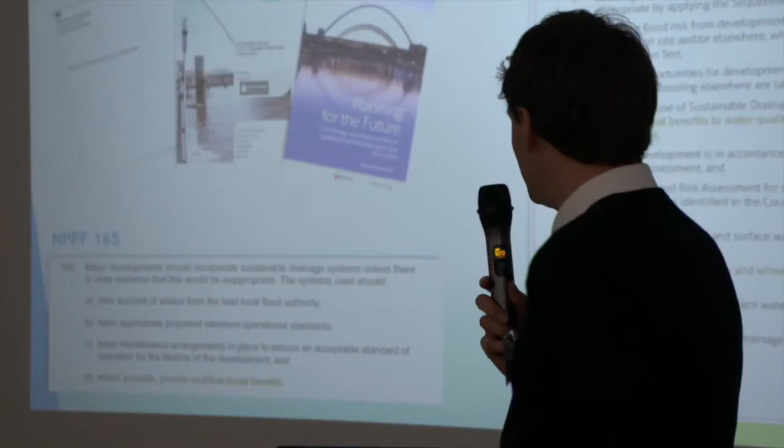As I said, policy is important, and within Gateshead we have a core strategy plan adopted in 2015. That was a plan across Newcastle and Gateshead, with both councils working together to deliver it. That's a post-NPPF plan, which we feel is significant. The plan sets out a number of policies on flood risk and SuDS, and also sets out specific site allocations, which were informed by a strategic flood risk assessment.

I've highlighted one policy on the screen - the image on the right is CS17. What that states is key in that it allows us to request multifunctional benefits and ensure water quality is maintained or bettered. The policy, importantly, goes beyond the requirements set out in NPPF Paragraph 165, which is also highlighted on the screen.

As the core strategy is a relatively recent 2015 plan, a number of sites were deleted from the green belt as part of it to facilitate growth, which we saw as a key need. There was an aspiration in removing those sites from the green belt to achieve good environmental design, partly as mitigation for taking those sites out of the green belt, making it an easier sell. All of the allocated sites had specific SuDS suitability and viability assessments carried out - site-specific studies looking at each site to be allocated.

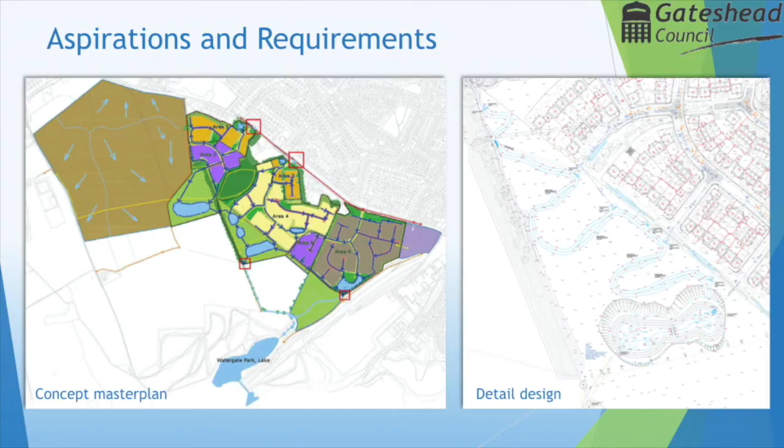One of those sites, highlighted on the screen, is what we call Dunstan Hill - a 53-hectare development coming forward for approximately 350 houses. There was a policy requirement for that development to include a green belt buffer as well as a 30-hectare area for habitat creation. As it was a green belt release site, there was a wildlife benefit need to offset, requiring that 30-hectare offset area. Although that wasn't necessarily driven by a desire to provide SuDS, setting that significant area aside for non-physical development allowed us to secure a significant area of land for SuDS.

That scheme itself included a long and winding swale which fed a basin, all enhanced with varied profiles and scrapes to create habitat and biodiversity. We feel that's one example of where working together, particularly on GI planning, can reap benefits across the disciplines.

The next stage for us at Gateshead, moving on from the core strategy, is to develop more specific policies, in particular what we call MSGP, Making Spaces for Growing Places. This seeks to move on from what we've discussed, with a greater focus on water quality and increased opportunity for highway SuDS. The policy also focuses on critical catchments which have flood risk or water quality issues.

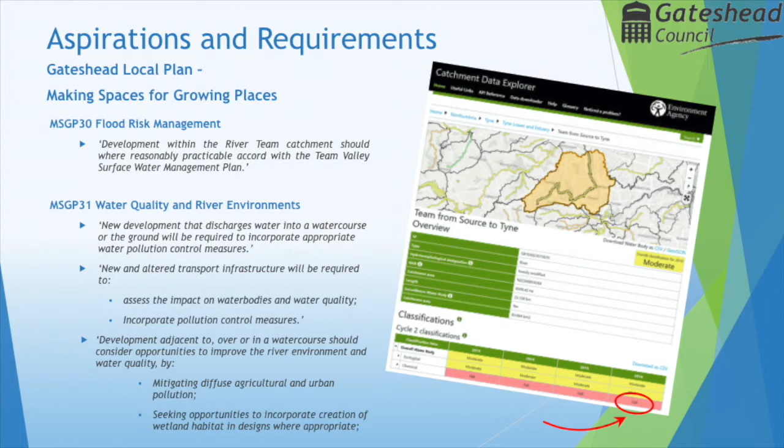One such area I've highlighted is the Team Valley Trading Estate, one of the North East's largest business and industrial parks. It's critical in terms of flood risk, as the River Team runs through the centre of the valley. That is currently a failing water body under the WFD chemical classification, and we feel highlighting the WFD within the policy adds weight to a requirement for multifunctional SuDS with a focus on water treatment within the trading estate.

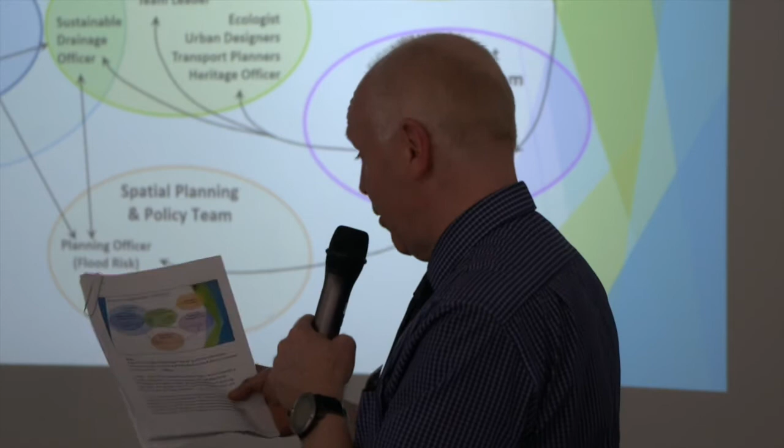This diagram sets out the relationship between the various teams at Gateshead, and it's a particular strength in the way the lead local flood authority, the planning authority and specialist advice teams work together. In the centre, the Built and Natural Environment team was set up in 2016 with experts from various departments such as highways, ecologists, transport planners, etc., all brought together in one team.

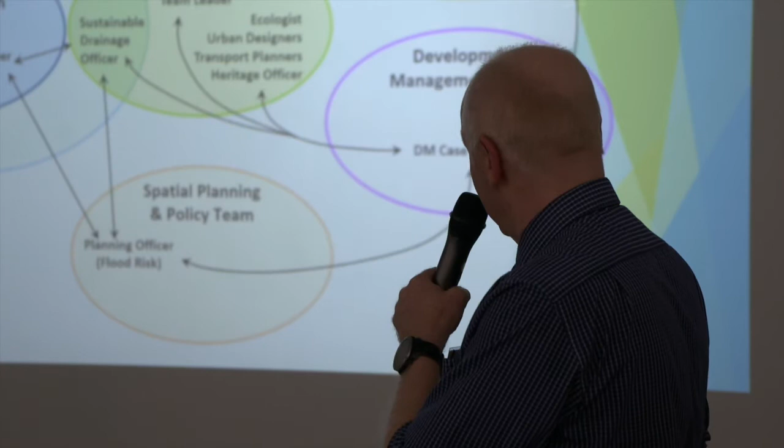We could provide special guidance on planning applications and offer a one-stop shop service. I'm actually quite unique, I think, as a SuDS officer, coming originally from a landscape background. Through close liaison with my colleagues in the highway and flood risk team, and with our spatial policy colleagues too, we've got a close working relationship set up, which benefits overall outcomes on planning applications. The Built and Natural Environment team is also able to work closely with the development management team or liaise directly with developers.

We're currently trying to improve our service to speed up the delivery of planning consent and work better with developers. In just the last six months or so, we've set up provision of a parameters plan to developers - expert advice from all our teams and specialists, identifying the key site constraints within an application and suggesting to the developer how they may best respond to planning policy for that site. To date, that's been well received, so we're going to continue with it.

Another idea we're bringing forward is, immediately after submission of the full planning application, to bring the developer in for an early consultation meeting. It gives them the chance to set out their reasoning behind the design and explain why they may have made compromises. We find that saves a lot of unnecessary toing and froing during the planning consultation process, and ultimately, hopefully, leads to a speedier approval.

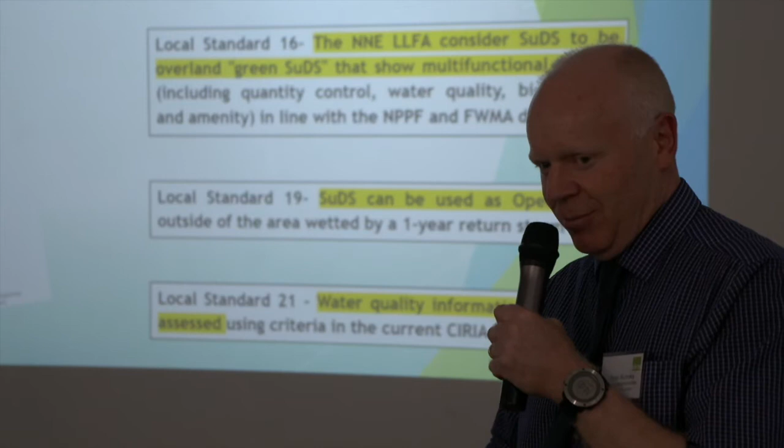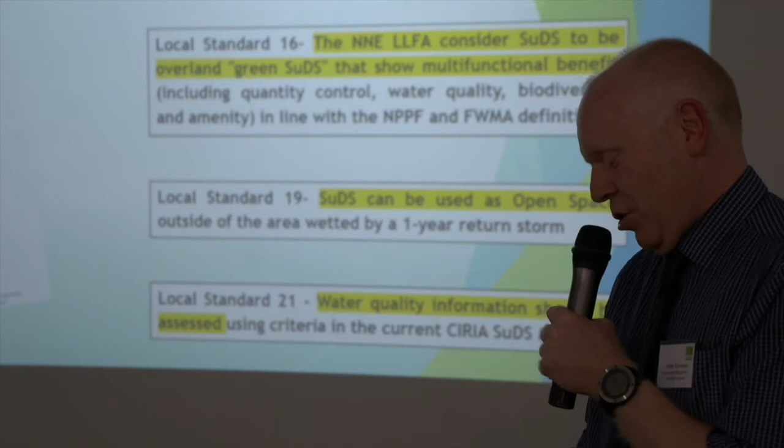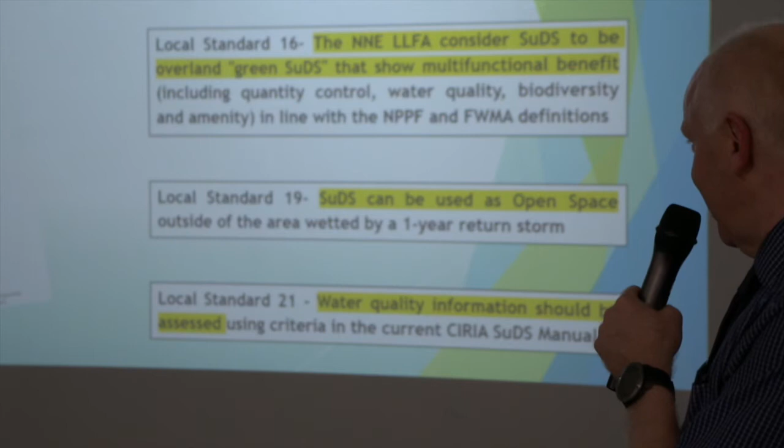We're also collaborating closely with colleagues in other authorities in the North East - about six or seven authorities now in the north of the region - working closely together putting together a set of regional guidance. This is an attempt to agree standards for items as varied as minimum discharge rates, greenfield runoff calculations, freeboard, that type of thing, so we can stop the playing off of each other that you sometimes get between authorities and developers. We're also trying to push for high quality multifunctional SuDS, setting out that they should be overland and green SuDS, that they can be used for open space, and that water quality should always be a consideration too.

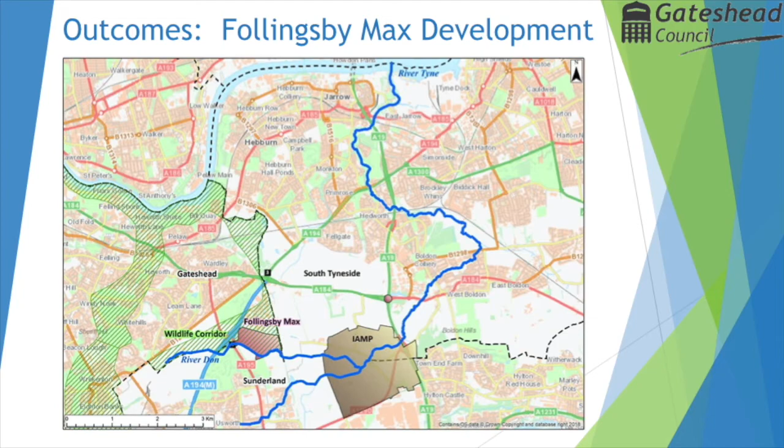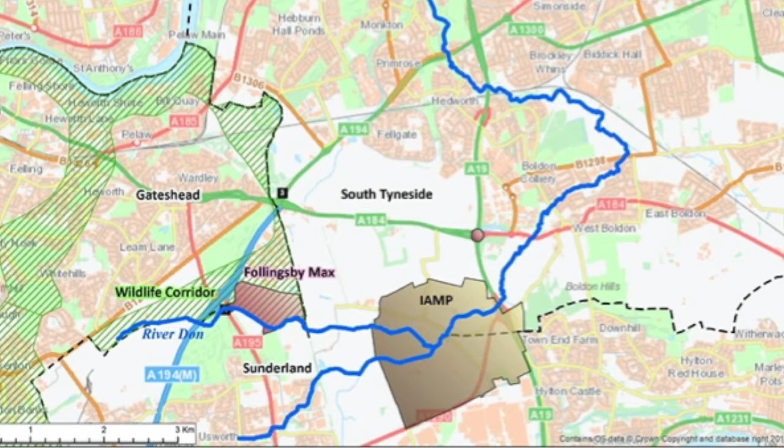I was just going to look at a couple of examples, starting with this one, which we call Follingsby Max. This is what we feel is perhaps one of our more successful schemes in terms of actual outcomes delivered, but also the way a multidisciplinary team came together to deliver it. Some background: it was a 39 hectare warehouse development on the southeastern edge of Gateshead, also within an enterprise zone. It's located on the northern bank of the River Don, shown as the squiggly blue line, with Follingsby Max being the pink area. The site lies within the upper catchment and was also within a strategic wildlife corridor.

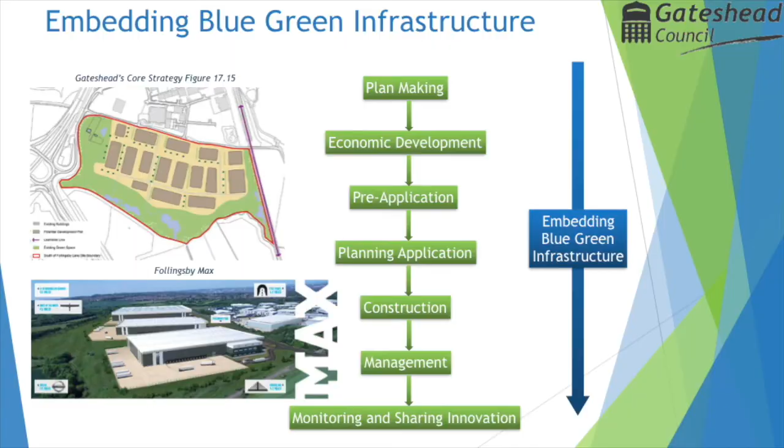This is really just to highlight some of the process we went through. A key part of the scheme's success was carrying the green-blue infrastructure vision from planning concept all the way through to delivery. In allocating the site, which formed part of the core strategy plan I mentioned earlier, the council had to develop strong site-specific policies to protect the river corridor, provide enhanced green infrastructure, and for the provision of SuDS to mitigate flood risk. We did that through designing a site-specific policy, which is this one, with parts of it highlighted on the screen.

The image to the right was a framework plan that sat within the policy itself. The development platform area is the yellowy colour, with a green-blue area surrounding it. By identifying a net developable area of only 22 hectares out of the allocation of 39, that allowed 17 hectares of the site to be set aside for landscape and ecological buffer, which would wrap around the site, as you can see.

Policy 3.5, the second one highlighted, required the enhancement of the River Don wildlife corridor, including the incorporation of SuDS and water pollution control measures.

We do feel that providing the developer with that level of certainty, particularly the framework plan, allowed them to come to the scheme with a real understanding of what the costing would be and what any likely viability issues may have been.

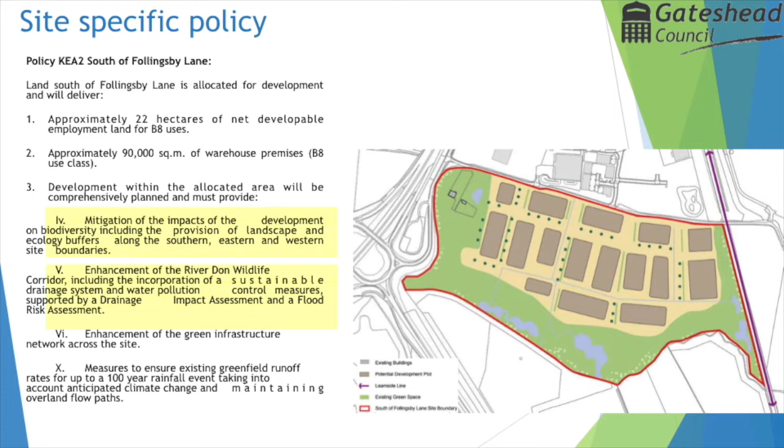They were also encouraged to work with us from an early stage, as well as partners within the River Don catchment and other partners, and together we developed a generous ecological landscape and drainage area. This gives a flavour of the variety and range of partners involved in developing that particular scheme.

As I said, strong policy is important, but that's just the start of it. This scheme certainly did benefit from an enlightened developer first off, which we feel was important, but also the council's multidisciplinary team, which Peter mentioned earlier - council specialists, as well as external partners, neighbouring councils, River Don Partnership, Wildlife Trust, etc.

That scheme again we feel is unusual, because what we were able to do was develop the green-blue infrastructure ahead of the actual building infrastructure itself.

In terms of the planning mechanism adopted, an outline application was submitted for the whole development, whilst a detailed submission was made for the green infrastructure zone, the development platforms, as well as the site access. That phasing allowed a rapid end-to-end planning process for the green infrastructure zone, from submission of the original application in October 17 to commencement on site in June 18.

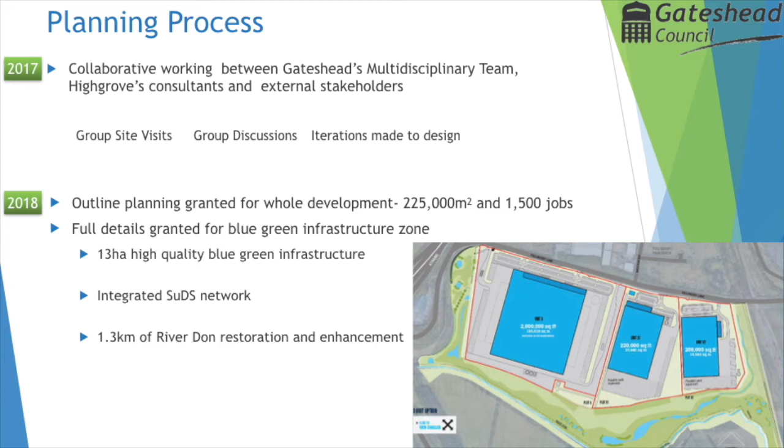As well as flood risk, biodiversity was a key consideration on that particular site, as it was in the wildlife corridor adjacent to the River Don.

The final design for the Follingsby Max site included SuDS basins and swales that form permanent and seasonal wetlands within 13 hectares of predominantly open habitat. Those areas also include grassland, native hedgerow, and 1.3 kilometres of restored and enhanced watercourse.

Just to put it in context, that site delivered 13 hectares of open space, which is equivalent to around 18 Premier League football pitches.

Ecological drivers behind the design were matched by the need to control surface water runoff to greenfield rates in response to downstream flood risk. There was also a desire to achieve good water quality too.

In response to this, the main form of attenuation was in the form of two drainage basins - a smaller one to the west on the left-hand side of the diagram, and a large one at the base.

This is a large scheme. The western basin is 1,600 square metres, and the main east basin is over 400 metres in length, with an area of around 7,000 square metres, with two separate discharges into the River Don, which runs along the very foot of the plan on the south side of the site.

Although the basins are designed to be dry, they also have smaller permanent areas of water in scrapes and small ponds to support a range of habitat types.

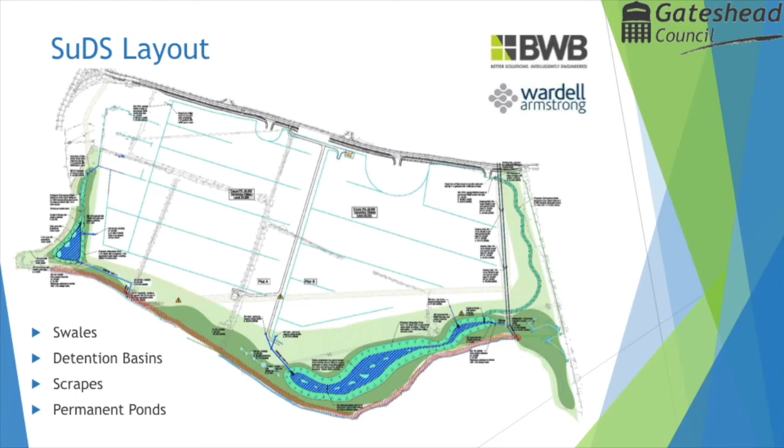Following submission of the detailed application, for the two development platforms - the big area in white - we'll be looking for a further treatment train to ensure that water quality will be at its best prior to entering the ecological zone. Final polishing of the water will be delivered through twin swales down the western and eastern boundaries. Construction of the development platforms, river restoration and green infrastructure commenced in June 2018.

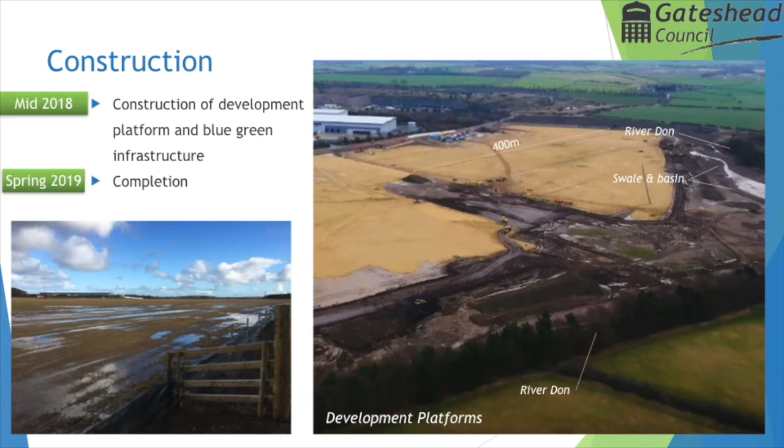River restoration works were substantially complete by November, and all SuDS green infrastructure and highway entrance works were completed in 2019. The main photo shows the River Don top right, giving a scale of the overall development. One platform is over 400 metres in length, with a swale and basin on the right-hand side that's also fairly generous in size.

Careful attention to detail was a priority on this site, and we feel it successfully delivered the original vision for the SuDS design. The top left picture shows the swale, which feeds into the main 400 metre long basin at the rear. The more orange coloured areas are coir matting for stabilisation of the soil.

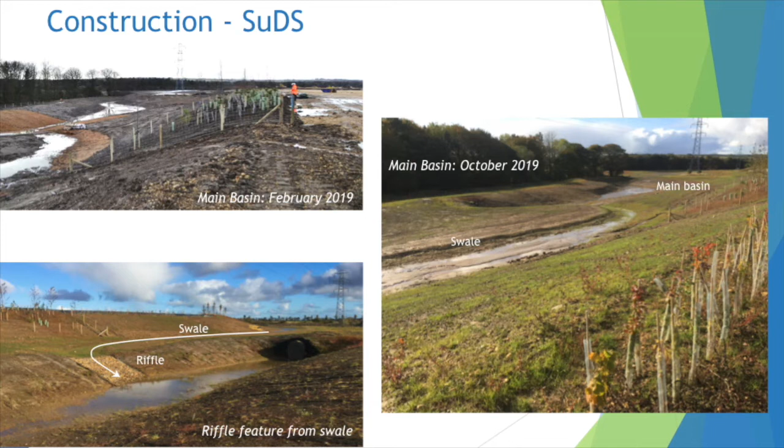As you can see in the lower left picture, a riffle feature was created from the swale down into the main basin. The reason the main basin is so low there is to connect into an existing outfall which went to the river. The right-hand photo was taken just about a month ago, and it shows that the site is already coming on quite well in terms of vegetation establishment, showing a pleasing outcome already starting to take shape.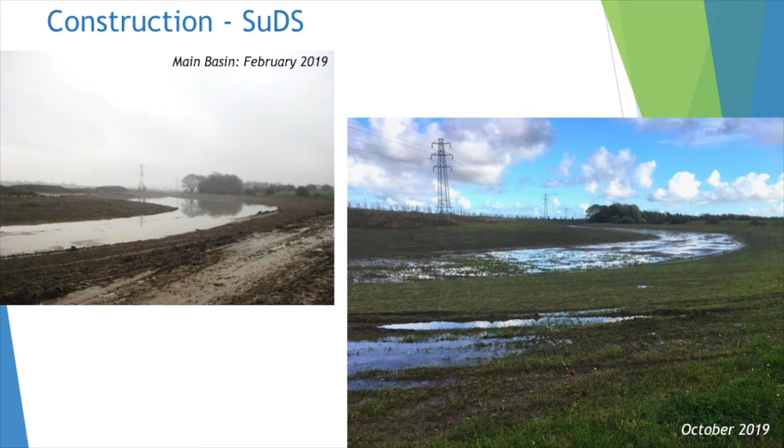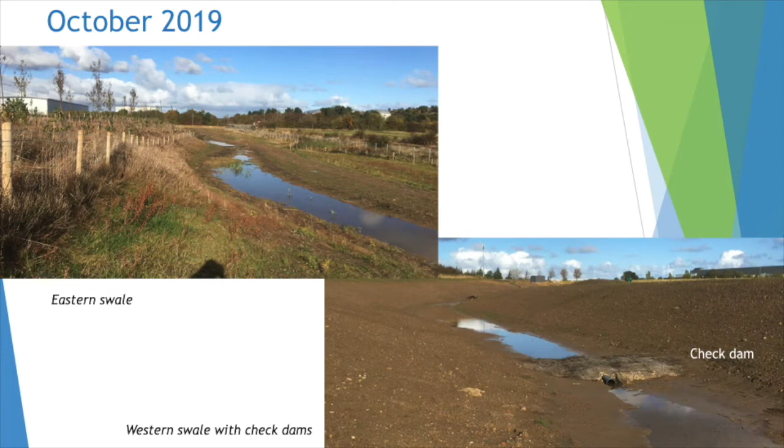Another couple of images just showing the boundary swales with check dams in place, also to create varied habitat opportunities. Although not specifically SuDS, the scheme also delivered a river restoration scheme quite successfully.

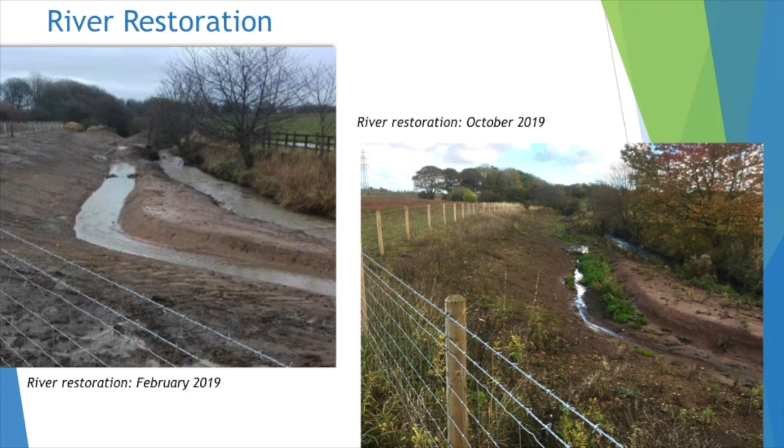The left-hand photo shows the original line of the River Don in the right-hand channel, which was very straight, engineered, and over deep as well. The scheme pulled back the left-hand bank to shallower gradients and also built in additional channels.

The right-hand photo just shows that maturing now. It shows that with site-specific policy, and the collaborative approach across all the disciplines involved, what can be achieved in terms of delivering multifunctional features on site. And I'll pass you over to Phil.

Okay, this is the second case study we're going to look at, which we call Innovation Village. Innovation Village was a 41 dwelling demonstration project that showcased innovative building techniques, including modular houses, and also included smart and green technologies. It was a joint venture between the council and Home Group.

That particular scheme coincided with an area-wide flood alleviation scheme that was a joint project between Northumbrian Water and the council. An agreement between the stakeholders enabled the drainage basin to serve both the flood scheme and to provide some attenuation for the housing itself.

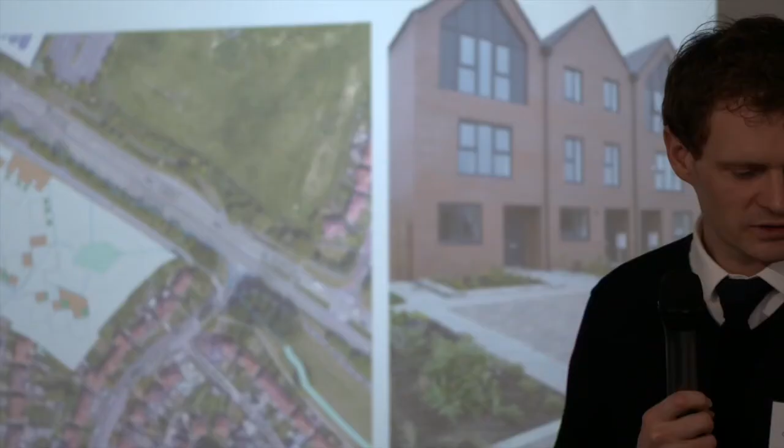That did involve cooperative working between the LLFA, the council as flood authority, as planning authority, and the developer. Again, through working together, as well as arriving at innovative solutions, we've been able to deliver the SuDS scheme on screen. The regional scheme was in response to surface water and sewer flooding issues, principally along the A184, the dual carriageway there.

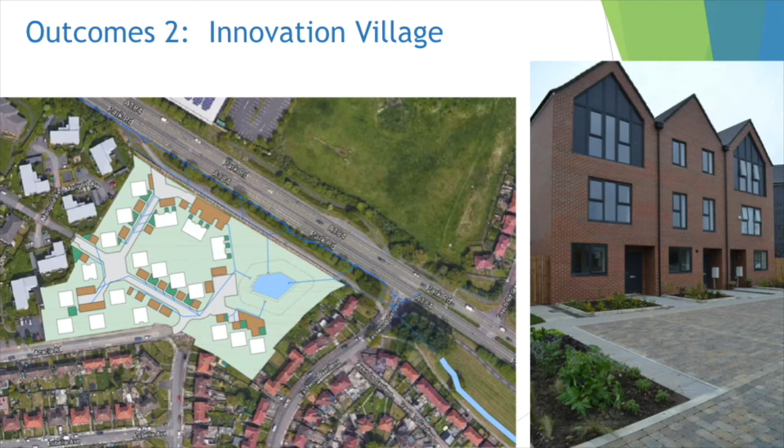New linear drains were installed along the southern edge of that road - you can maybe just see the blue line there. They fed into a swale to the bottom right of the main photo, and also the drainage basin adjacent to the housing development. Home Group released the land for the basin on the proviso that they could also share it for the runoff from the housing scheme.

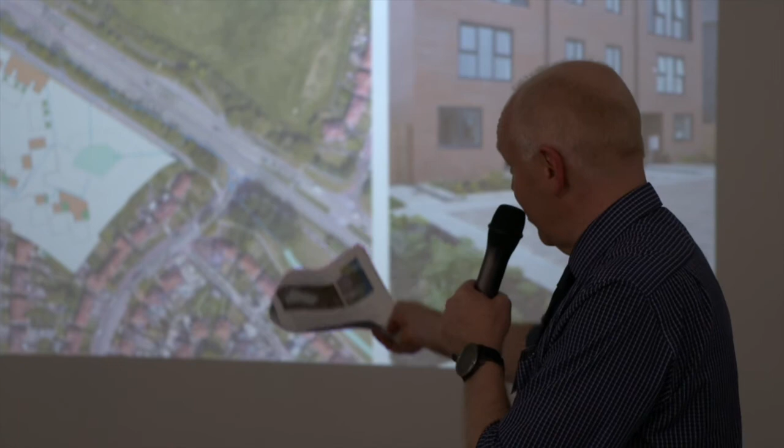But due to a lack of volume, the lead local flood authority required the developer to really keep discharge to a minimum. Hence there's a significant amount of source control going on at the site, including a whole series of rain gardens, which are the green squares on the plan, and the tan areas shown there, which is all permeable paving.

On site, 95% of the highway runoff runs into the rain gardens as well as into the permeable driveways, as Peter's already highlighted. All drainage is via flush curbs with minimal use of road gullies.

The rain gardens and permeable paving will be adopted as SuDS features via a 106 agreement, but they won't form part of the adopted highway.

This did involve a great deal of negotiation between the LLFA, the developer's consultants, Northumbrian Water, the council's legal team, as well as the highway authority. All of that was basically required to get through some of the historic perceptions of what was and was not possible in relation to both drainage and highway adoption guidance.

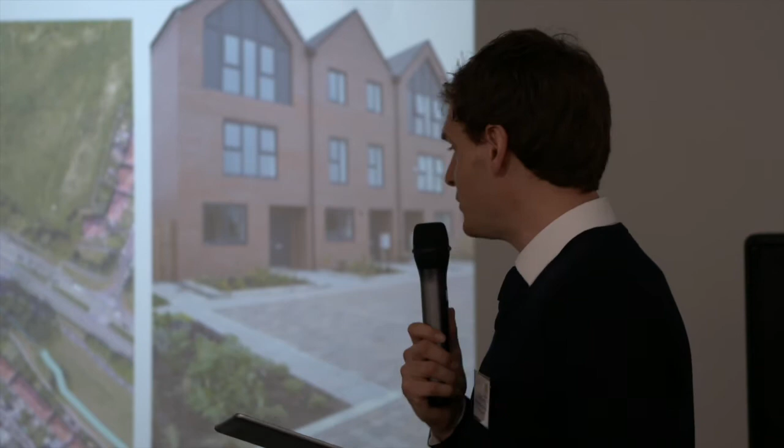The highway authority was not entirely comfortable with the flush curbing between the highway and the footpath, as that goes against some guidance around providing access for the visually impaired, which would normally require a distinct edge to the footpath. But in this case, we were able to negotiate a flush edge, primarily because it was in a cul-de-sac location and was low trafficked.

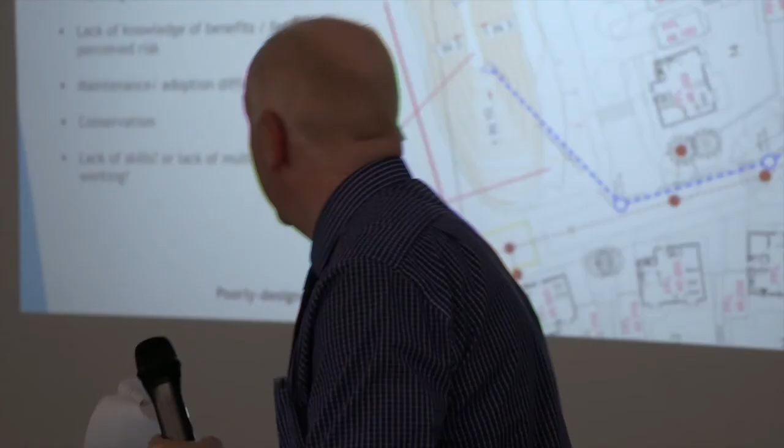So we've shown a couple of our more successful schemes. We'd also like to touch on where things haven't gone quite so well from a SuDS point of view in Gateshead. From working on planning applications for the last 5 years or so, I still feel a lot of developers seem less willing to embrace what I'd call green or surface level vegetated SuDS, which, from a landscape background, I'm very keen to achieve.

I think one of the reasons, particularly in the northeast, is a viability issue. It's often raised - lower house prices and land values up in the northeast often seem to raise viability issues. Developers often come to pre-app with fixed housing numbers in mind. During the planning process, these numbers will always seem to go up as well, just putting more and more pressure on the available space for SuDS.

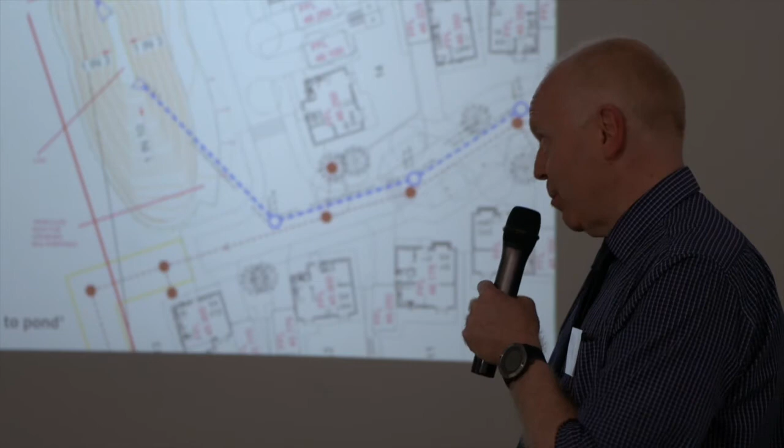Original land deals between developers and landowners don't seem to be accounting for the full cost or land take of SuDS. And to compound this, housing targets are a very high priority for the authority, which again provides another pressure on the numbers and makes it very difficult to reduce housing numbers within an application if we're trying to free up space for the SuDS features.

I feel there's a lack of knowledge of the benefits of SuDS amongst developers. We often see quite poorly designed and constructed features, even though if these were designed more sensitively and skillfully, this would create a distinct asset which would hopefully raise property values within developments.

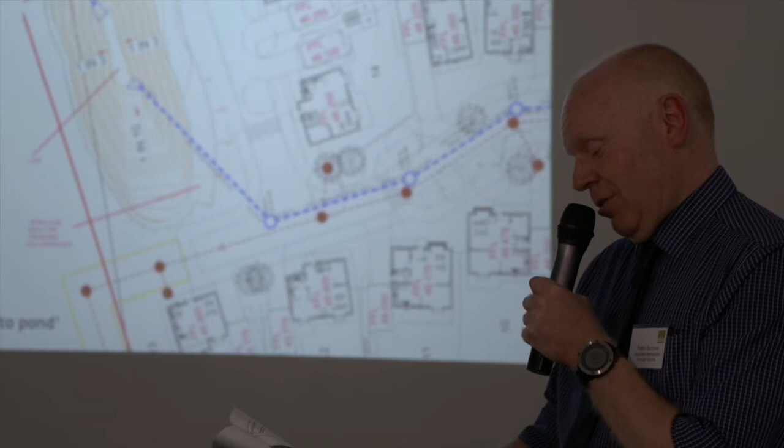I've also noted there seems to be either a lack of education on SuDS amongst members of the public and our council members too. This is obviously a fairly common theme nationally, with fear of flooding or drowning or pollution within SuDS components. We've just recently had a major green belt release site where no amount of convincing of the flood risk benefits and improvements could convince the councillors that the situation wasn't going to be worsened by installing a large basin in their village.

Just in terms of what's shown here, this is an example where space gets squeezed. So a designer tried to squeeze in this drainage basin. From the LLFA's point of view, we were trying to press for a more usable area of open space, as it was the only one in the development. And they responded by just putting in a 1 in 10 ramp down into the basin to access a tiny little flat area in the centre, which obviously doesn't benefit anyone, and I think would have been better with underground storage in that situation. Fortunately, this didn't make it to final approval.

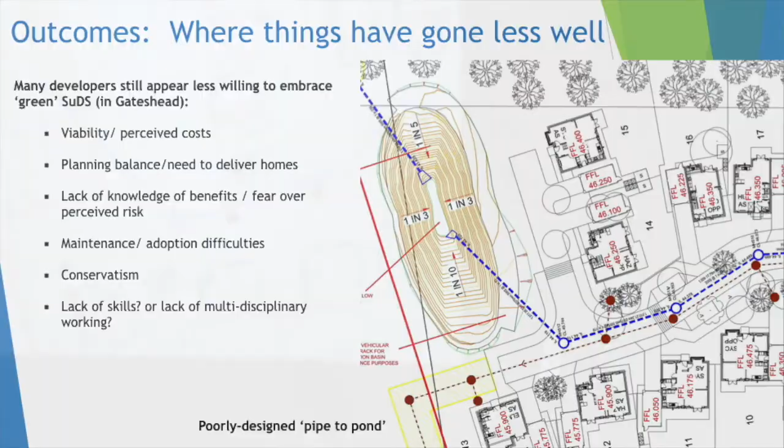We have the usual experience of maintenance and adoption difficulties. Gateshead does have what's known as the Gateshead model for adoption, being willing to take on SuDS features through the Section 106 process. To date, in the last 4 years or so, only 2 developers have actually taken up on this. They generally seem to go for the private management company approach instead. Now, whether this is due possibly to not wanting to go through the lengthy Section 106 process, that could be one of the reasons.

We also feel there's a conflict between the requirements of good SuDS design and the requirements of highways adoption as well. For example, if you try and secure rain gardens to drain highways and treat the water quality there, there's a bit of awkwardness - the highway authority doesn't want to accept private runoff into their basins or rain gardens. The council budgets are also very tight, so there's a question of who will maintain that feature too. So it's another stumbling block there.

I feel there's still a lot of conservatism. Developers obviously turn to an engineer at the early stages of site development to develop the highways, the earthworks and drainage scheme, and they bring on board an architect to develop the layout. There often seems to be a complete lack of green space professionals early in the development phases.

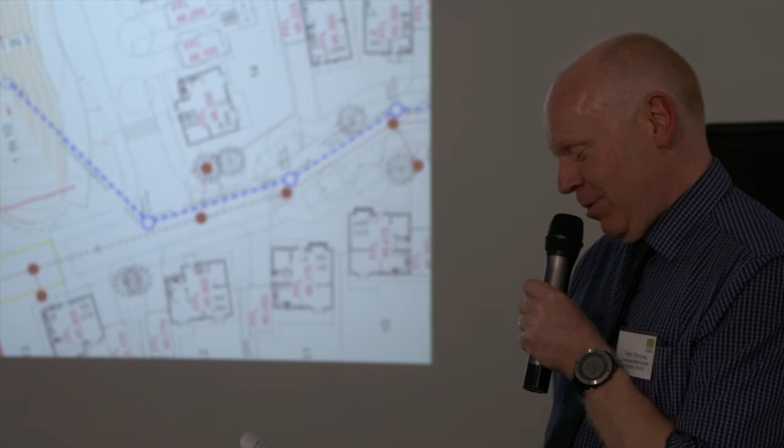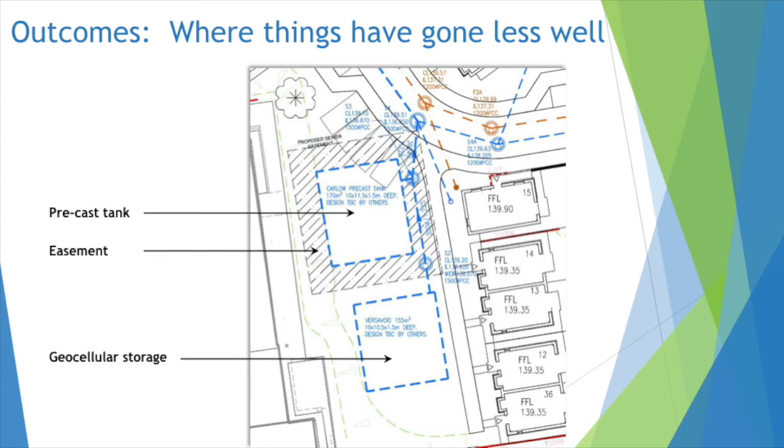Another quick example of pressures on spaces, or not really thinking the design through. This was another scheme in Gateshead where the 1 in 30 runoff went into a precast concrete tank, which is that upper square with the blue lines around it. That necessitated a large easement around it as it was going to be adopted by the water company. To the south of that they had geocellular storage as well, and the two features combined completely neutralised that area of green space, the only green space in the development, preventing any major tree planting, resulting in a disappointing outcome for the green space design of that development.

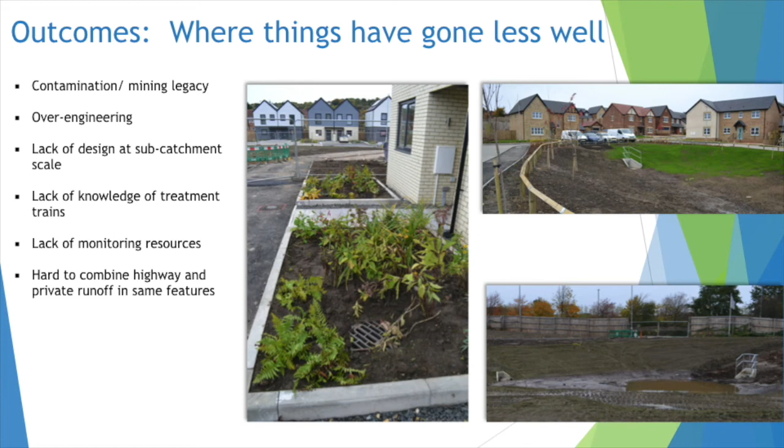Gateshead has a fair few constraints as well in terms of SuDS design. The ground under the town is completely riddled with the legacy of coal mining, like a Swiss cheese with holes everywhere. So we in Gateshead were selected by the Coal Authority and the Environment Agency in a pilot scheme developing guidelines to overcome the constraints on SuDS brought about by the mining legacy, principally looking at groundwater flooding and pollution from mine water. There's quite considerable concern in that area at the moment with groundwater levels and mine water rising, and we're getting incidences of mine water flooding. So if combined with SuDS features, there's a considerable concern there amongst the Coal Authority.

Being in the north as well, a lot of our substrate is clay, so those two items together obviously pose a considerable constraint on infiltration. It'd be interesting to see Kent's views on how the two areas differ in that respect.

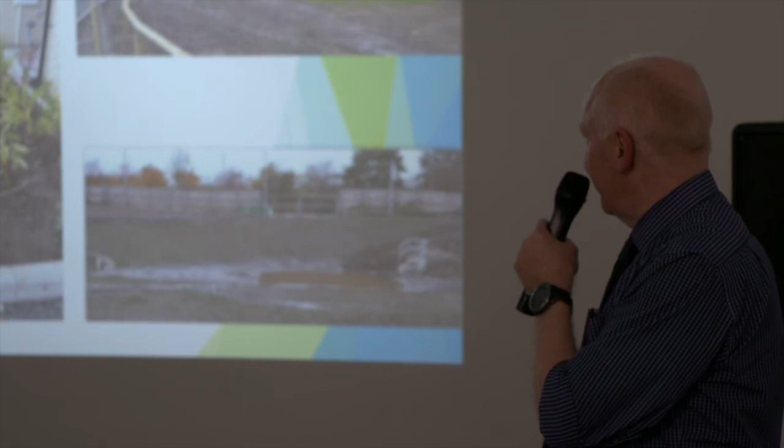I find there's a tendency still to over-engineer SuDS features. The images on the right show classic examples of over-large inlet-outlet features, and in this case someone's come in and plonked safety railings on them as well, and then fenced off the whole of that upper basin again, which isn't ideal. I think one of the big issues regarding SuDS design, particularly on bigger housing developments, is there seems to be an inability, certainly in our area, to design on a sub-catchment scale. We still very much get the big pipe to a big SuDS feature and not looking at lots of small features.

Whether this is due to maintenance concerns, or I don't know if it just needs a fundamental look at how housing layouts are actually designed.

I've also come to the conclusion there's a lack of skills or knowledge in designing treatment trains within SuDS schemes. If you direct people to the SuDS manual, it's quite hard to really get to the bottom of exactly how big a basin should be to produce the correct level of treatment, etc. And in submissions, that aspect of SuDS is usually quite poorly covered, both in flood risk assessments and drainage assessments.

I've also pointed out within the LLFA we have a lack of monitoring resources, so it's hard to keep track and make sure features are built correctly on site. For example, this left-hand photo shows what was supposed to have been a rain garden, but unfortunately the contractor on site has actually put raised kerbs around it, which completely prevents any water getting in there in the first place.